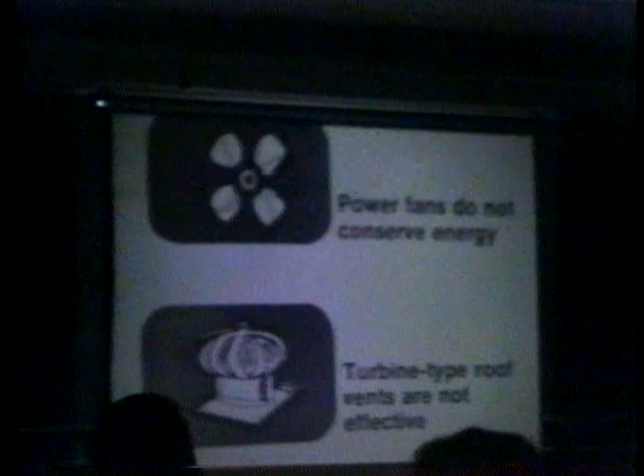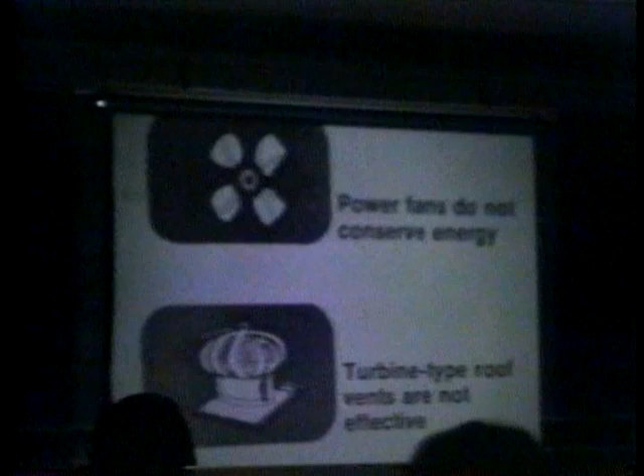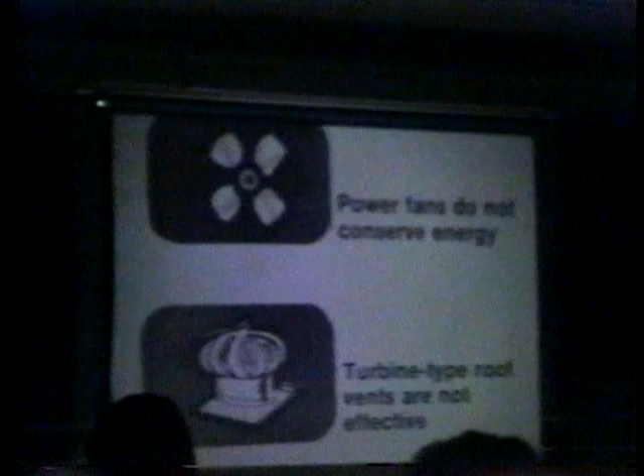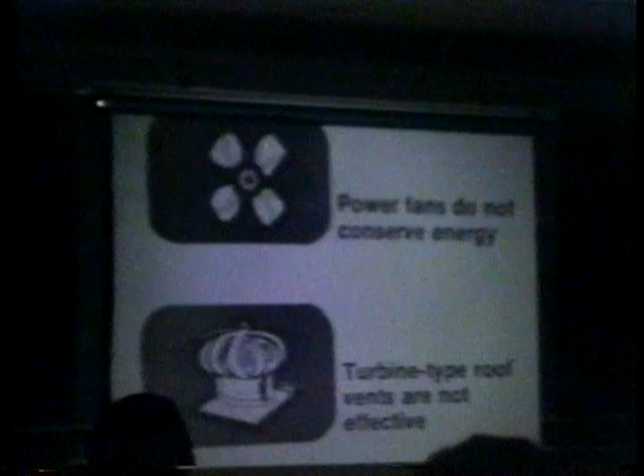It has been proven without a doubt that power fans generally do not conserve any energy. You know, the powered attic fans. Extensive field tests were conducted in the vicinity of Houston, Texas, on a number of houses, and that data was validated through computer modeling and got the same results. It showed that more energy was used to run the fans generally than was saved. And then, of course, a very popular type of vent are these turbine vents. Early in my crusade, people were asking me a lot about turbine vents, and they are not particularly effective or do any more than any other kind of a vent. Generally speaking, it's going to be supplemental to a regular system.

It'll have to have elaborate controls and piping. This is what a lot of people don't understand about a solar heating system on a house. I could have one, or Ed could have one, or Al, and mess with it all the time and keep it running.

But if you were selling it to somebody and he wants a thermostatically controlled, no-problem situation, it's got to have a very elaborate control system. And so that's a consideration. Maybe this is a little bit out of date. I said here, consider as a last resort.

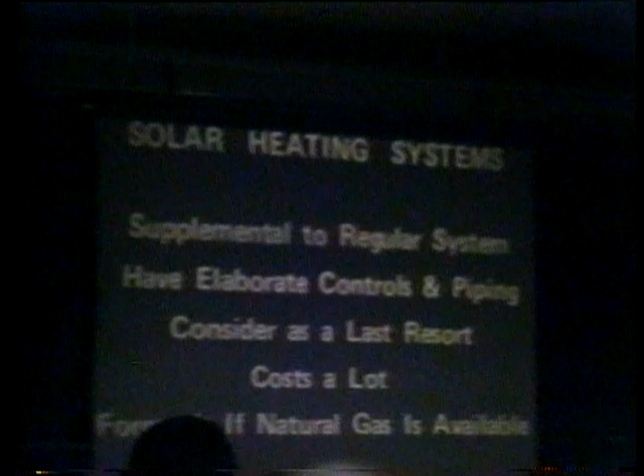I meant there, you want to consider all other alternatives, such as gas, heat pump and things like that, before you go jumping into the situation. It's going to cost a lot. You better get ready for that. And it'll never pay for itself if you've got natural gas. I think that's still true from when I made this slide 2 years ago.

Now those are just general thoughts. There are a lot of applications for solar energy, and I'm not bad-mouthing solar energy. Just heating domestic hot water is a lot more attractive as a possibility. But generally speaking, solar's time of being really cost-effective is still coming.

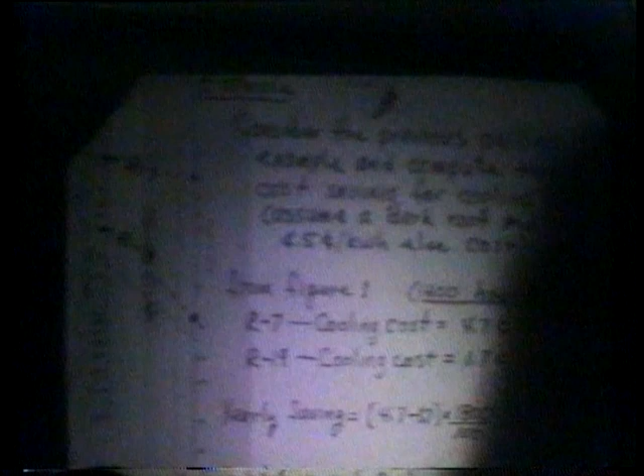With the R7, the cooling cost is 4.7 cents per square foot. With the R19 it's 1.7 cents per square foot. Now, the difference between those will then be the saving. And so here I've computed that. I think it was a coincidence, it turned out to be the same number that we had for the heating, but I assure you it was just a coincidence.

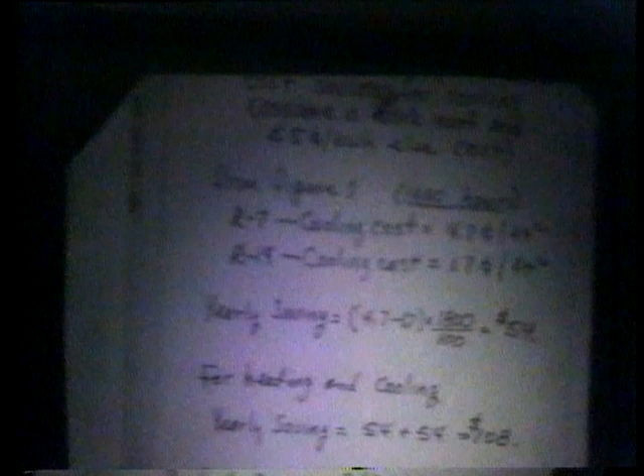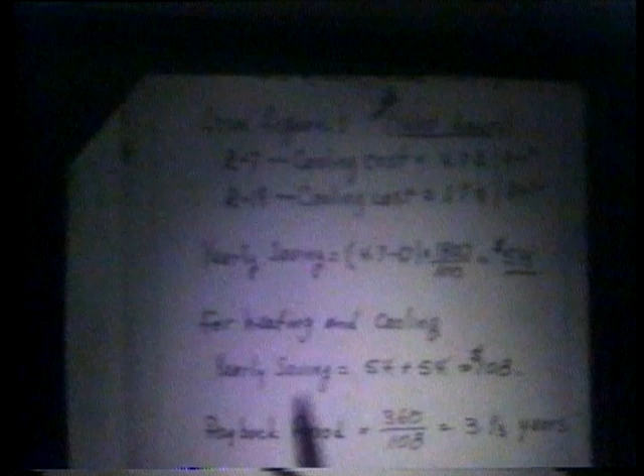See, we have here 4.7 cents minus 1.7 times 1,800 square feet, divided by 100 to get it in dollars. So you see then the total saving was 54 for heating, 54 for cooling, or 108. Now, it was just a coincidence that those two come out the same.

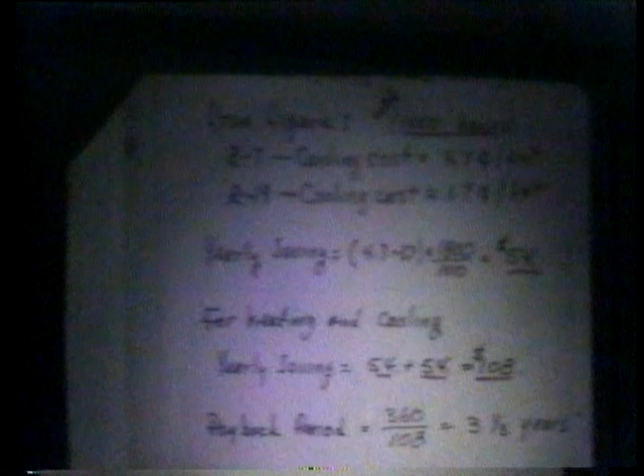Now, if you look at it this way, if you consider that there's no escalation in the fuel cost or anything else, it would take about 3 1/3 years. So that makes it look a lot more feasible than it did before. 3 years is not a bad payout on anything.

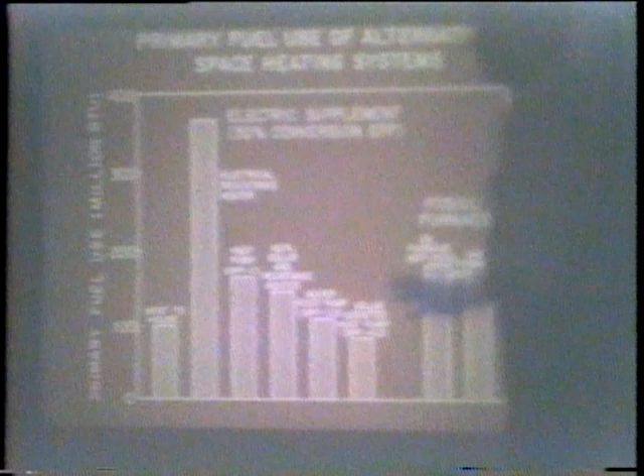You just put that down on paper and it boggles your mind that we throw away twice as much energy as we get in the form of electricity, and just think of all the electricity we use in this country. There's something wrong with that. Okay, so you can see that's probably not a good deal.

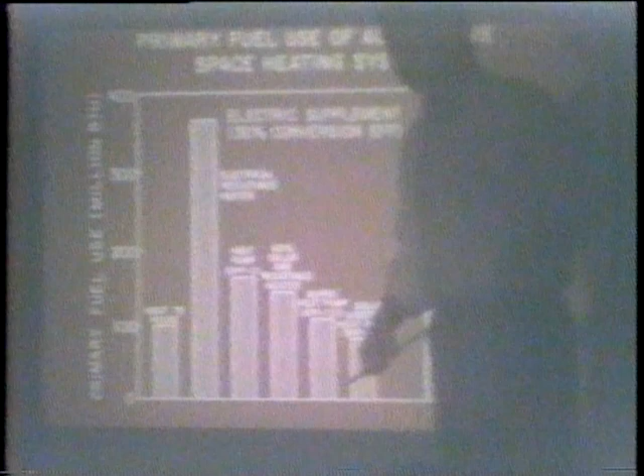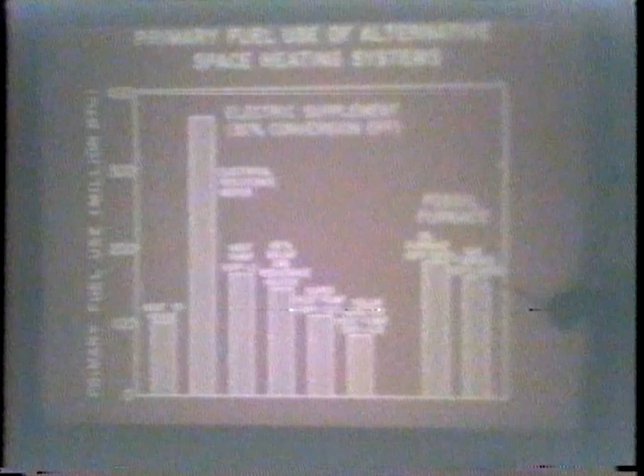And I'll say this right now, our company in Stillwater will not install an electric furnace. If a guy comes in and wants an electric furnace, I say, go see my competitors. And then in a couple of years, when you can't afford your electric bill anymore, come around and I'll make more money replacing it than he made installing it in the first place. And it's the truth. And I have some very good friends with ONG, but the fact is you can take electricity and beat the pants off of it.

I'll come down to a gas furnace, and we show an efficiency of 60%. And on every furnace label that Carrier or Fedders or Lennox or anyone else builds, they show an efficiency of 80%. A 100,000 BTU furnace, that's input, and you look on the little tag and it says output 80,000. Well, that's in a laboratory running 100% of the time with an engineered vent system on it, exactly the right amount of combustion air and so forth.

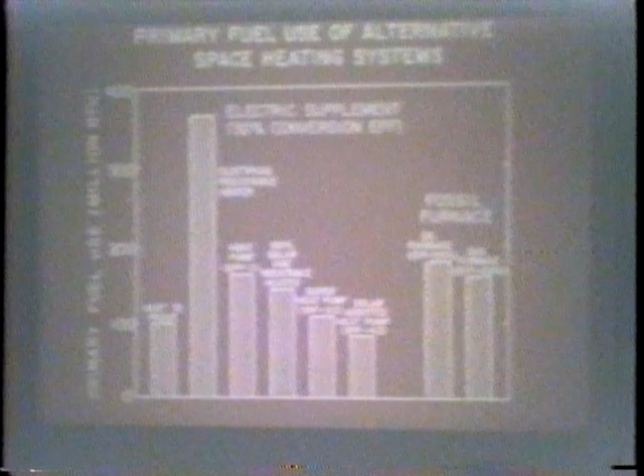The fact is, in a house, and we're good, you know, but let me tell you, when you go out and put it in the house, first of all, you have cycling. Because you've got to put a furnace in there that'll carry the house at whatever the lowest temperature is going to be outside in the wintertime. We design for 0.

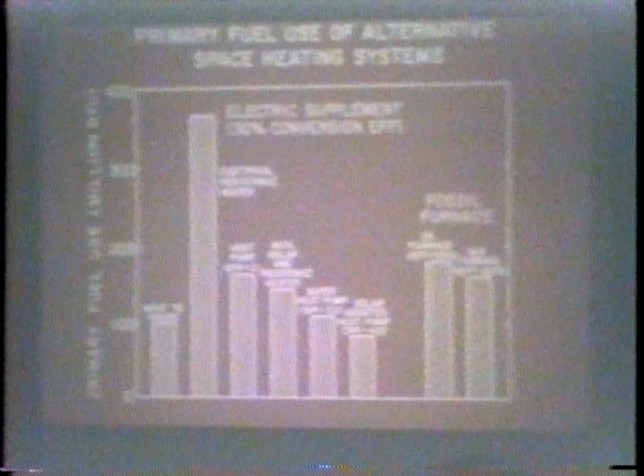So it only hits 0 here about 3 hours a year. Maybe 5, I don't remember the exact number, but it's not very much. Well, any other time, that furnace is oversized. And of course, our average winter temperature here is around 40 degrees. So you can see how much oversized it is.

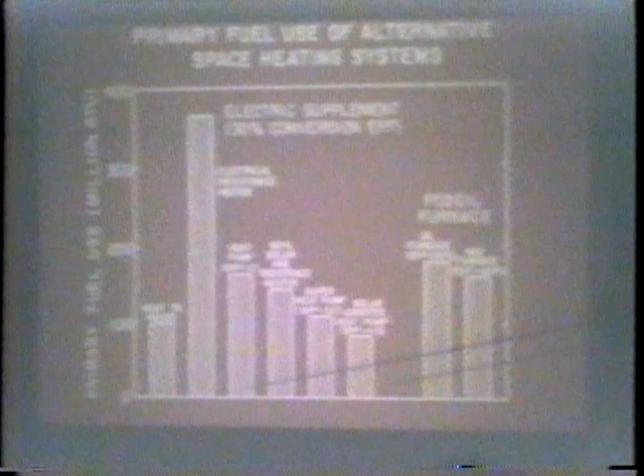With the heat pump, and by the way, this is not perpetual motion. This machine simply goes somewhere and is able to capture heat from a lower temperature than you want to use it and pump it up to a higher temperature. That's all a heat pump is. That's all any refrigeration cycle is.

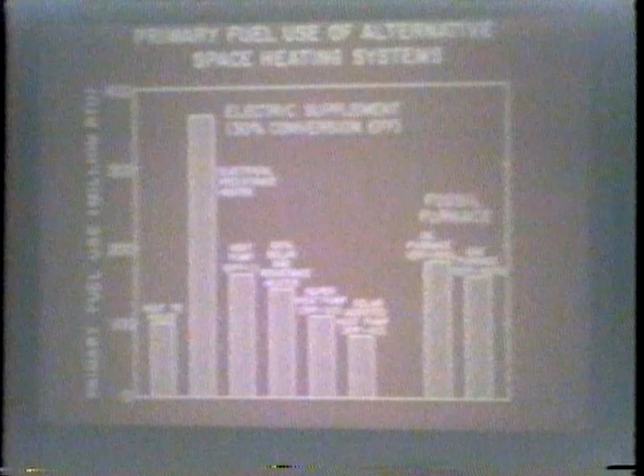It's simply a machine that will pump heat from a low temperature to a high temperature, just like a pump in a well will pump water from a low spot to a high spot. It defies gravity. Well, this defies the laws of thermodynamics the same way. By adding some power, you can pump that heat uphill.

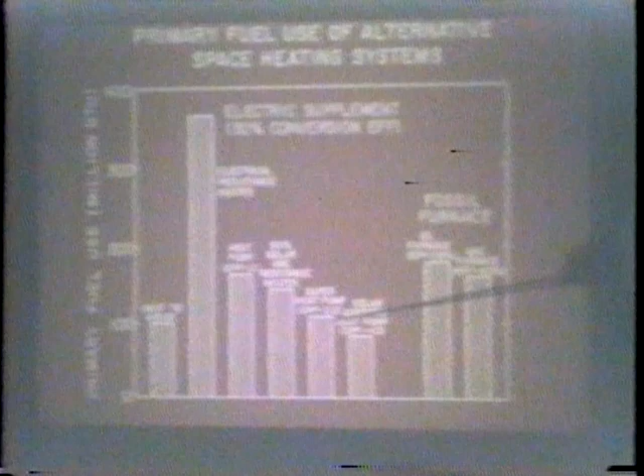Okay, if we can get to somewhere along here, actually it'd be about 3.3 or something, would get this graph down to exactly what that is. If we can do that, then we're getting 100% efficiency out of our source fuel. We use this much to generate the electricity, but we came back and for every one of these that we used, we got 2 or 3 more free.

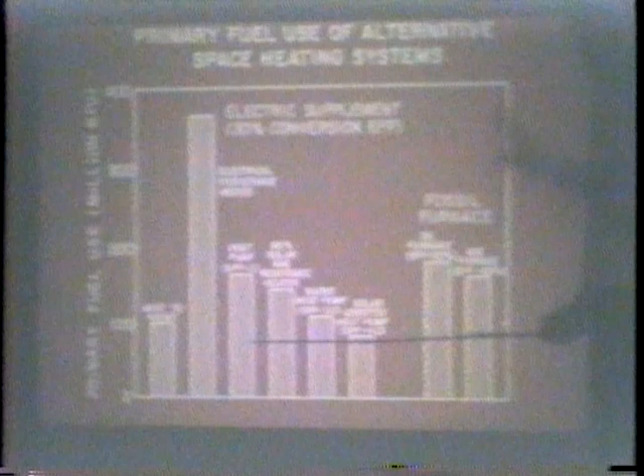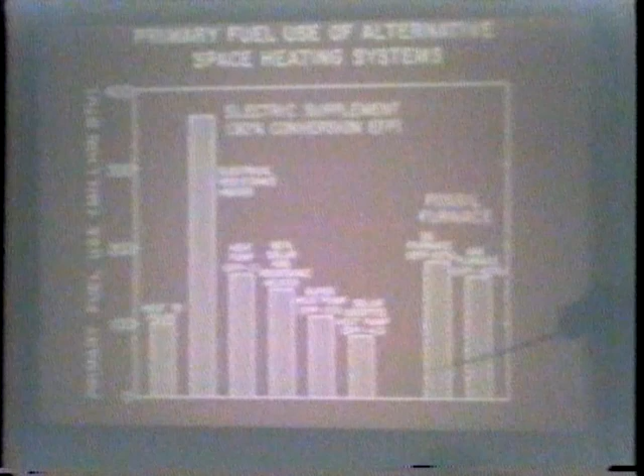Out of the ground, out of the air, wherever we want to get it. Out of wastewater, out of a pond. There's a million places that there's nice heat for a heat pump. Anyway, if we can do that, then we can get over into these areas, and actually you can make it more than 100% efficient, because you're using your energy to move heat, not to create heat.

And I might just mention right now that with the refrigerants that we use today in typical air conditioning and heat pump systems, that temperature will be 180, 190, maybe 200 degrees when it comes right out of that compressor. And you have to cool it down quite a ways. In fact, you have to cool that down to about 120 degrees or 110 degrees, somewhere like that, before it will start turning into a liquid.

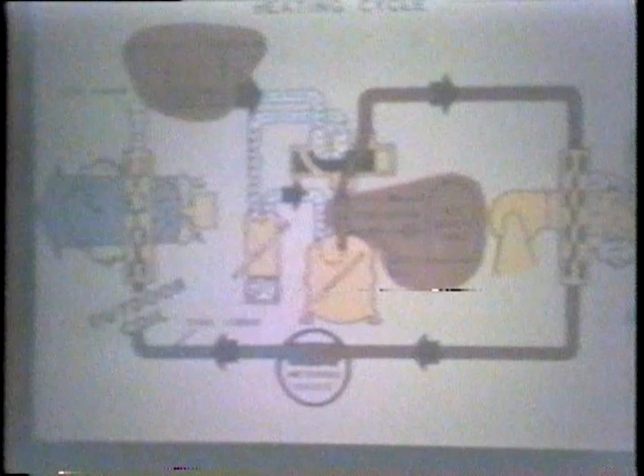And it's that difference that we call superheat, from the temperature it is down to where you have to cool it before it starts condensing into a liquid. Now, one of the things we do, I'll just mention this in passing, is right here where that hot gas is coming off the compressor, there are several devices on the market now called desuperheaters or hot water preheaters. Carrier's trade name is Hot Shot. There's ECU units. Heat Stick is the one you have a piece of literature on in the handouts.

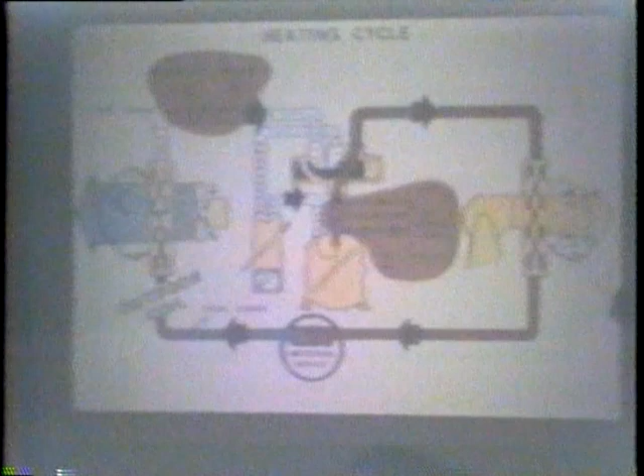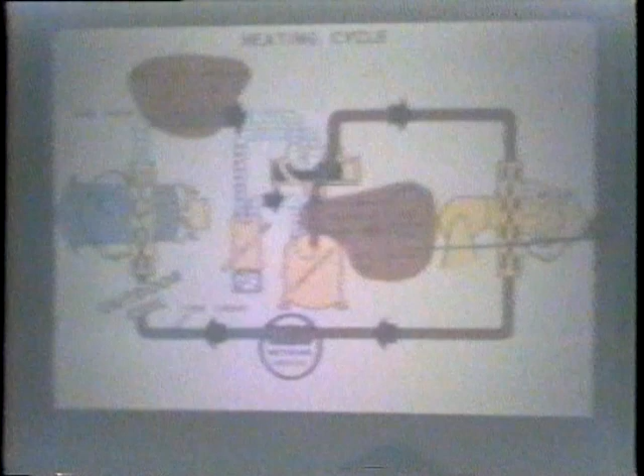But anyway, what we do is we take that very hot gas and somehow put it in contact with your domestic water, so we can make hot water out of it. And the little Heat Stick that we show you is the simplest one we've seen. That's simply a rod that screws down in the hot water tank, and this hot gas comes over, goes down through that stick in the hot water tank, and then back, and then goes on its way.

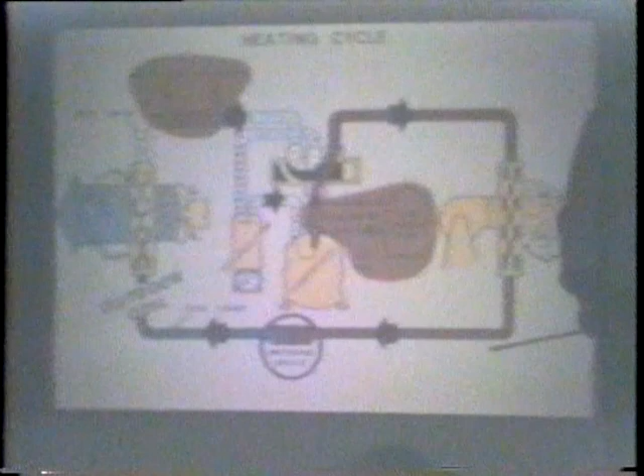And we can hold a hot water tank at 140 or 150 degrees real easy without any outside energy going to it. Now in the summertime, that's free because that's heat you're removing from the house and you have to get rid of all of it anyway.

This is the basis of the whole horizontal earth coil system. And again, I want to point out right here that what we've done is we have taken water source heat pumps, or we have taken air-to-air heat pumps, and we have adapted those to water source machines. And the earth is a gigantic flywheel.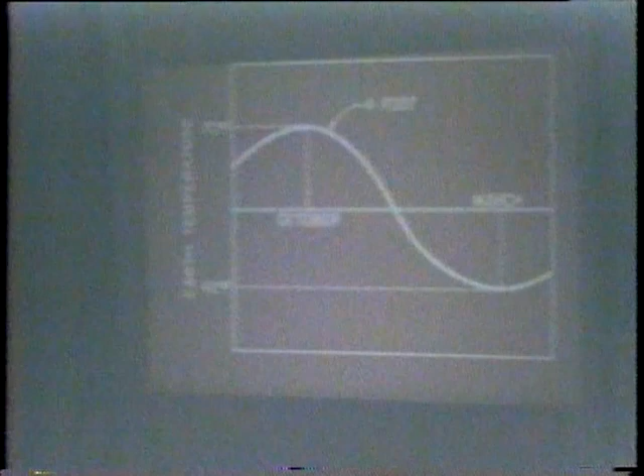As you go deeper into the earth, beyond the 4-foot level, this curve will have less and less amplitude until, like Carl said, after you get 10, 15 feet in the ground, it's level. It's constant. As a matter of fact, if you integrated this and averaged it all out, the average temperature in our area should be 62 degrees.

At that time, we had developed kind of a design for the earth coil. We wanted to use a 4-inch, 160-pound test PVC pipe, and we decided that we would lay it in the same 2-foot wide trench, 4 feet deep, and we would simply take these 2 pipes out to the septic lateral field and then bury them beneath this 3-pronged septic lateral field.

Next, we get a schematic diagram. The dashed lines are the septic lines and boxes. The solid lines are the earth coil lines. Cross-section showing the earth coil lines and the septic line. And in this total system, going all the way back to the house, I think we had 840 feet of 4-inch PVC, and approximately 600 feet of it is out here in these lateral lines.

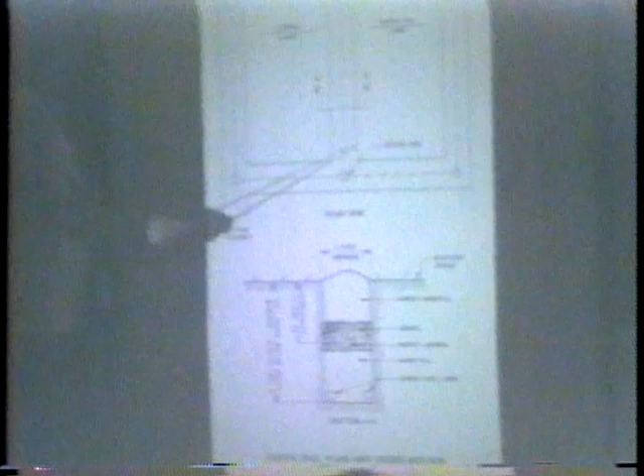And I have a couple of inspection ports out there where I can peer down in there, and it is very wet down here. In certain areas, there's a great deal of liquid in here, and it's very wet. So I think we can confidently say that whatever heat transfer rates we're getting, it is between PVC plastic pipe and very wet sand-packed soil. And then once you get out away from the sand fill, we have that very familiar old Oklahoma red clay.

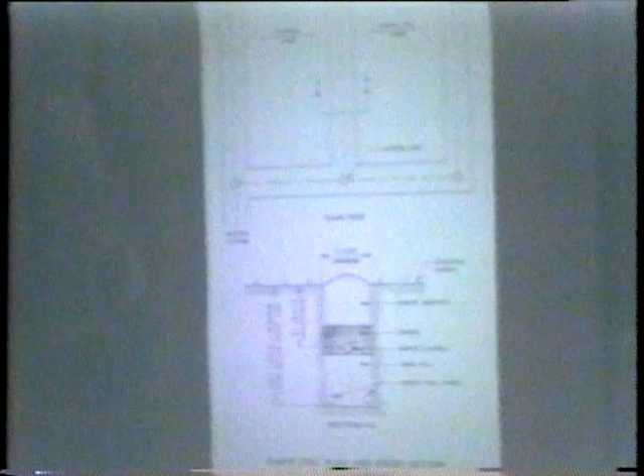I think we can move on.

Now, the reason that we buried those things under the septic field is that in our early research, we found that the coefficient of heat transfer varied by a factor of about 10 to 1 between dry soil and wet soil. As a matter of fact, very dry sand is a good insulator.

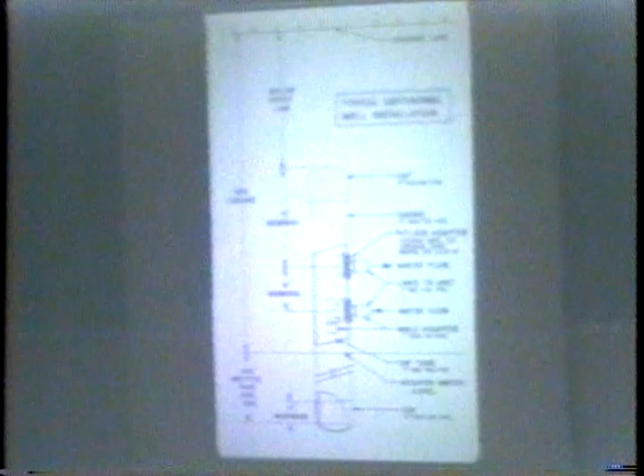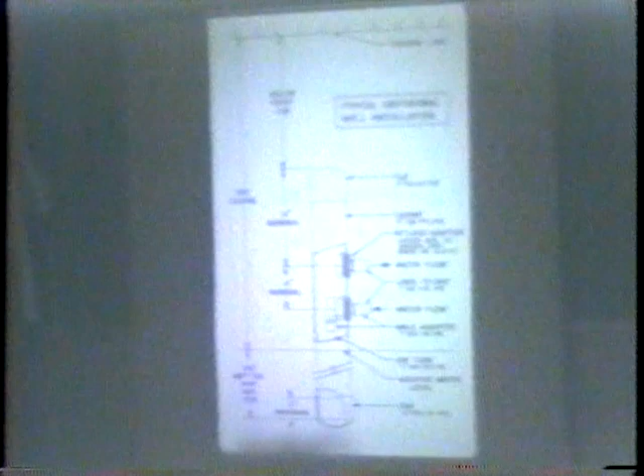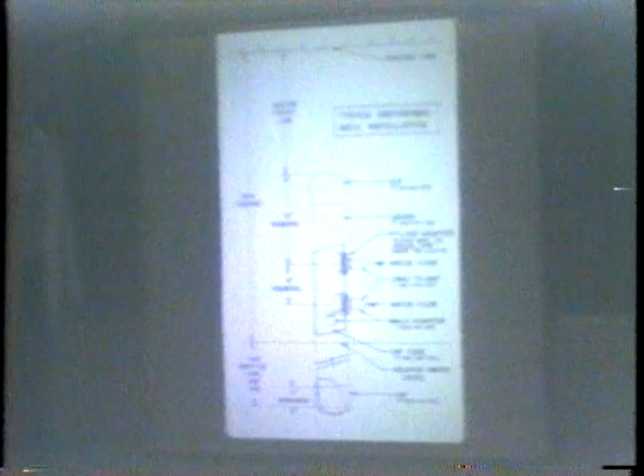And in our area, around here in Oklahoma, we've been getting by with about 100 feet per ton. And reduced into dollars, that's about $650 or $700 per ton. The actual equipment room installations that we've been making are about the same in cost as regular air-to-air systems. So these systems have a premium price associated with them, and that largely can be isolated to the cost of the well itself.

The question was, can you tell if there's any storage factor? And I'm going to give you in one sentence what the United States Department of Energy paid $160,000 to find out. In terms of time, the time constant associated with the earth coupling, 1 or 2 days is forever.

You could run a heat pump non-stop, suck heat out of the ground, check the temperature of the well bore and the surrounding area. You could run it for 2 months solid, turn it off for 12 or 24 hours, and you can't ever tell anything ever happened. The time constant is 1 or 2 days. 1 or 2 days is forever. Okay,

the heat transfer rate, another important thing, and this is based on linear feet of well bore. They paid a third of that $160,000 to find this out. The heat transfer rate is not a simple thing. Since the time constant is very short, the heat transfer rate depends on cycle time. If the machine is run non-stop for 30 days, the heat transfer rate is lower than it is if the machine is running 50% of the time and cycling.

Savvy? In other words, say you were heating the house and you're chilling the well bore. If you run constantly for 30 days, that constant will be about 2.5 BTU per linear foot of well bore per degree Fahrenheit delta T average from well bore to far field per hour. If you're in a high cycle situation, it may be 3 or 4.

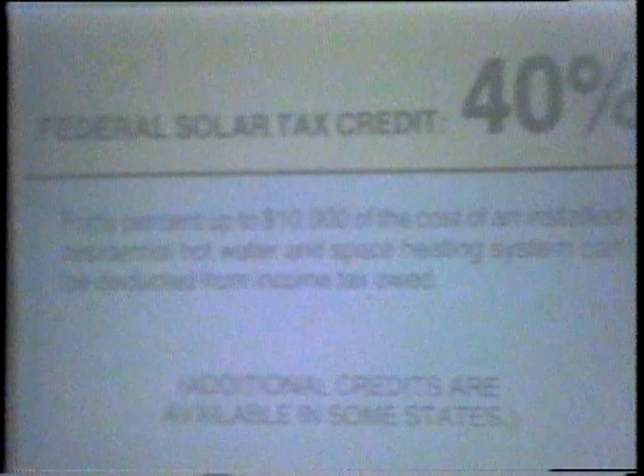This was a part of the windfall profits tax that went through. Our oil and gas interest is going to suffer a little bit, but we're smiling out of one side and frowning out of the other, because this gives us the ability to figure 40% tax credit now, up to a maximum of $10,000 for the cost of an installed residential hot water and space heating system from the federal level.

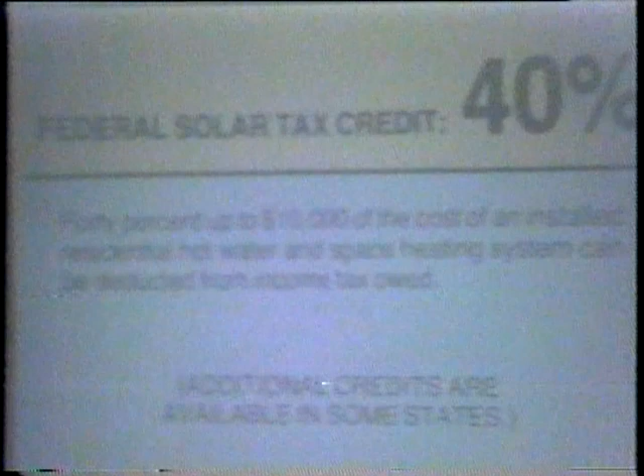Now, let me point this out to you. Yesterday, the Oklahoma Senate was to meet and discuss the possibility or probability of a new solar tax increase from the state level. It presently is 25%. So if we can take our 25% into 40%, we're talking about a 65% cost off the cost of the solar energy application in this area.

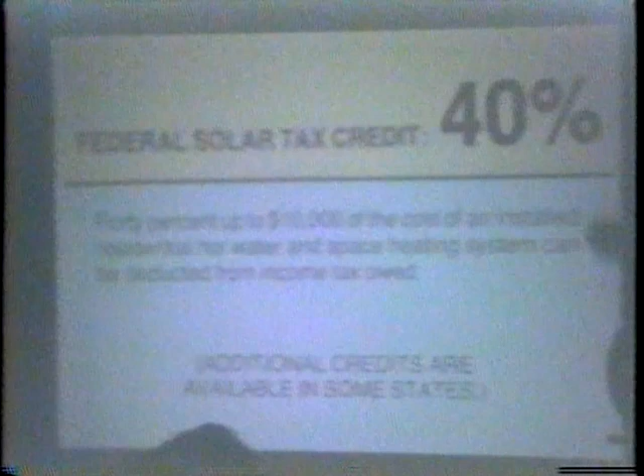The Senate was to consider yesterday the probability of raising that 25% up to 55%. If and when it becomes law, the residents in Oklahoma will be looking at not only 40% from the federal level, but 55% from the state level as well. What does that say? That says 95% of the cost of the solar energy application in Oklahoma can be written off in tax credits.

A solar hot water system for an average family of 4, that would be 2 collectors, a heat exchanging module, which I'm afraid we're not going to get into because of time, but please stop by and we'll look at it after the class, and an 80-gallon storage tank would cost you in the neighborhood of $2,200 for the equipment. Now, that's not installation, that's just equipment.

Okay, taxes, it's going to vary depending on where you live, what your sales tax is, 2 to 4, 5% would be in addition to that, and installation would be in addition to that. A ballpark figure for installation would be anywhere from $600 to $1,000, depending upon the length of copper runs and the amount of insulation required.

Any other questions? Anything on payback on that? I'd rather you not ask me about payback. I'd rather you ask utility companies, because people would tend to think that maybe I'm biased, but I'll give you my heartfelt opinion on the data that we've worked up.

Versus electricity, we can sell you a system just about like I described for about that money and show you a payback versus kilowatt hours consumed. And you'll realize that money that you spent, if you can take your tax credits, is paid back in a 4.5 to 5 year period. Now, we're assuming an annual inflation rate of about 10% per annum, which when we were figuring that was a little high, but now it appears a little underestimated. Versus natural gas, we're projecting that figure out to around 7 to 7.5 years.

As you start building the house, you need to do a few other things, such as sill sealer. You're losing energy, you're losing dollars. So the tighter you can make the home, the more you can keep that conditioned air in that space, whether it's heated or cooled, it's conditioned air, then less dollars. And that's what everybody's after.

They want to be able to live in a house that they can afford. It's not just the house payments anymore. It's what the utility bills cost.

Here again, we talked about the 7-foot ceiling. I said 7.3 — it works out. I'll tell you what we do: we buy a 14-foot material and we cut two 7-foot studs, and you get your plates on it. It comes out 7.3, and it works pretty good.

The question is, what about concrete block? Well, I have a prejudiced viewpoint because I was formerly a bricklayer, but I believe that the bottom dollar in these is with concrete block.